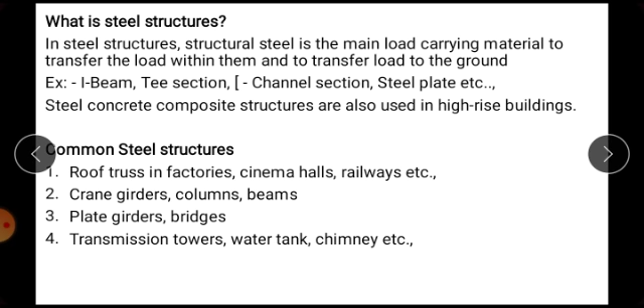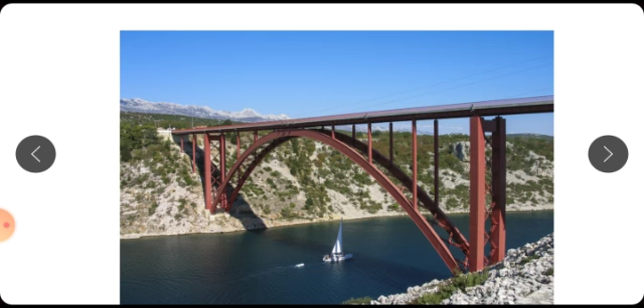Now this is the old arch bridge. This is the steel structure, you just see this. This is an I section, this is an L section. So this is an old arch bridge.

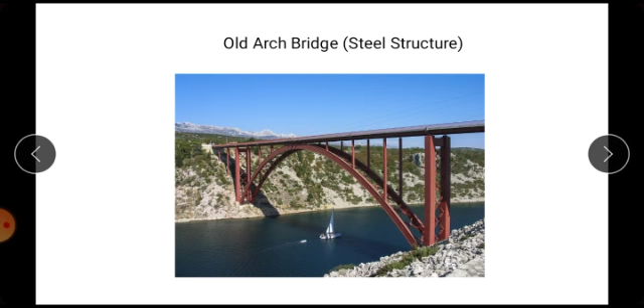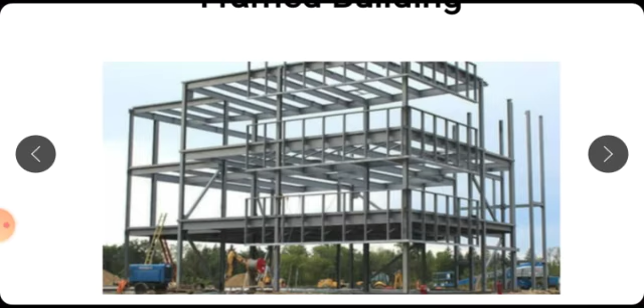Now this is a frame building, made of steel. You just see how in this building there is mostly use of steel.

Now, advantages and disadvantages of steel. High compressive strength and tensile strength per unit weight, hence low construction weight, and it saves spaces.

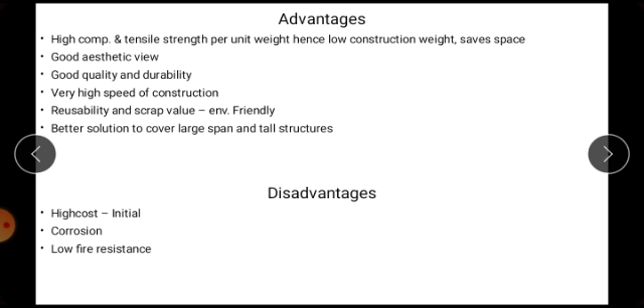Just see what is the steel structure. Now there is a definition of the steel structure. Structural steel is a category of steel construction material that is produced with a particular cross section or shape, and some specified value of strength and chemical composition.

You just understand: structural steel composition - strength, size, shape, strength, and storage are controlled in the most advanced countries.

The word structural steel includes a broad variety of low carbon, manganese steels that are used in a great number of civil and marine engineering applications.

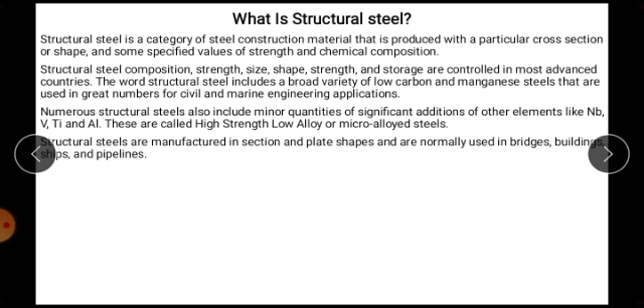And there is a chemical composition of some typical structural steel. There you see type of steels and designation, IS code - which IS codes are used, and...

Carbon, manganese, sulfur, phosphorus, silicon, carbon equivalent, which is the standard structural steel IS 2062.

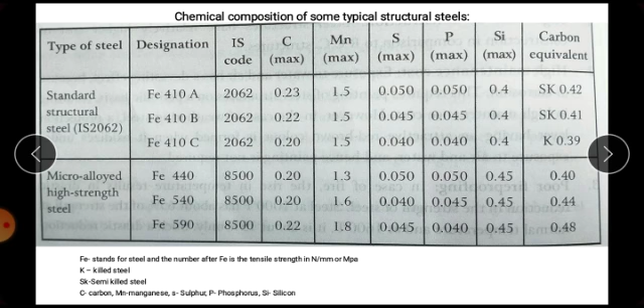K means killed steel, SK means semi-killed steel. C stands for carbon, Mn for manganese, S for sulfur, P for phosphorus, and Si for silicon. These are the signs used in this table.

Now the properties of structural steel: physical property and mechanical property, two types are there. For physical property, unit weight of steel is 7850 kg per meter cube. Modulus of elasticity E equals 2 into 10 to the power 5.

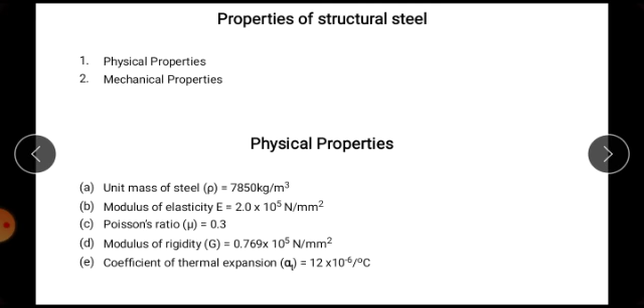Coefficient of thermal expansion, alpha T, equals 12 into 10 to the power minus 6 per degree centigrade.

For mechanical properties: yield stress is Fy, tensile stress is ultimate stress Fu, and the maximum percentage elongation on the standard gauge length.

Notch toughness is another property. These properties are seen in the IS code for steel, IS 800-2007. This table is in the IS code.

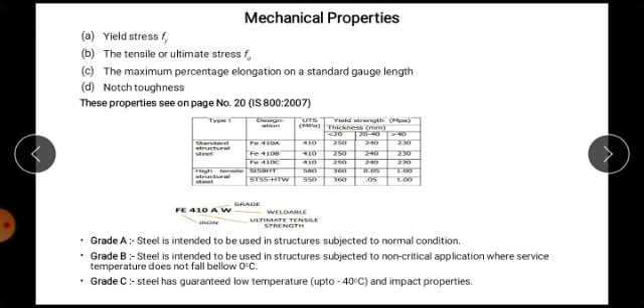Here we have grade A, grade B, grade C. Just see this table, it's not very important, just learn something from it.

Here you see Fe 410 WA. What is the significance of Fe? It means iron. 410 means ultimate tensile strength, grade A, and W stands for weldable.

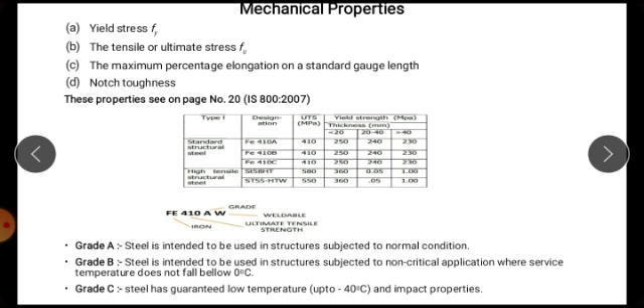Grade A steel is intended for use in structures subjected to normal conditions. Grade B steel is intended for structures in non-critical applications where service temperature does not fall below 0 degree centigrade. Grade C steel has guaranteed low temperature properties up to minus 40 degree centigrade and impact properties.

Now, rolled steel sections. There are various types of rolled steel sections manufactured, listed below: rolled steel I section, also called beam section, rolled steel channel section, rolled steel angle section, rolled steel T section, rolled steel bars, rolled steel tubes, rolled steel plates, rolled steel flats, and rolled steel sheets and strips.

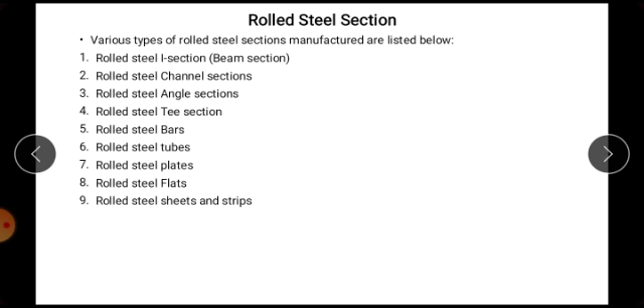Just read this and learn. Now rolled steel I sections, which are also called steel beams or rolled steel joists, are extensively used as beams, lintels, columns, etc. It consists of two flanges and one web.

These are available in various sizes, ranging from 75 mm into 50 mm at 61 Newton per meter length, to 600 mm into 210 mm at 995 Newton per meter length.

Following five series of rolled steel I sections are manufactured in India: ISJB stands for Indian Standard Junior Beams, ISLB for Indian Standard Light Beams, ISMB for Indian Standard Medium Beams, ISWB for Indian Standard Wide Flange Beams, and ISHB for Indian Standard Heavy Beams.

Now see the I section. What is an I section? Here, this is the I section. You see two flanges here, this is the web.

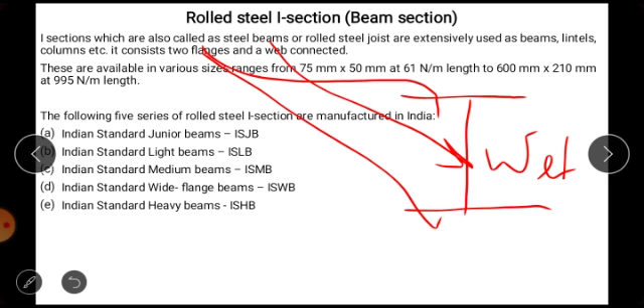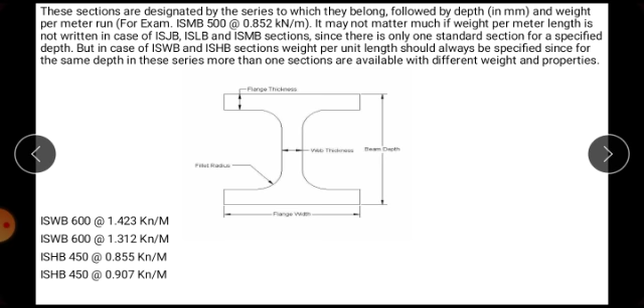Now we go to the next topic: rolled steel channel section. Channel section is a type of C section. This is not very important. The channel section or C section consists of two equal flanges connected to a web at both ends.

Channel sections are extensively used in steel framed structures. They are available in various sizes ranging from 100 mm into 45 mm to 400 mm into 100 mm, with corresponding unit weights of 58 Newton and 494 Newton per meter length respectively.

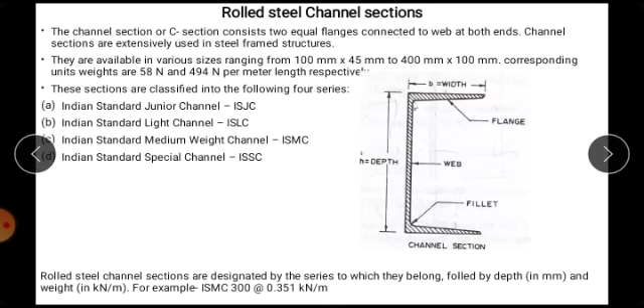Now we go to the next page. Here, rolled steel angle sections. This is L type of section, known as angle section. There are two angles: ISA Indian Standard Equal Angle, and ISA Indian Standard Unequal Angle. Thickness of legs of equal or unequal angles are the same.

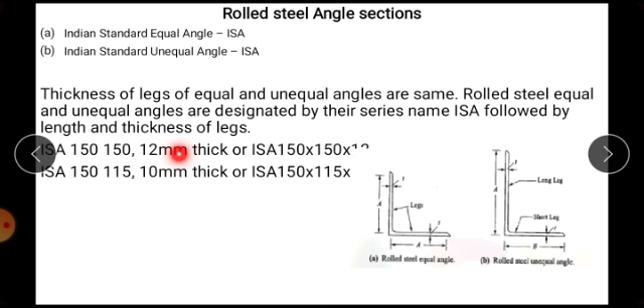Rolled steel equal and unequal angles are designated by their series name ISA followed by length and thickness of legs. Okay, this is for ISA, you just read it. This is for equal angle, and this is for unequal angle. Just see, and we are going to the next page.

Here, T section, rolled steel T section: ISNT Indian Standard Normal T bars, ISHT Indian Standard Heavy Flange T bars, ISSLT Indian Standard Special Leg T bars, ISLT Indian Standard Light T bars, and ISNT stands for Indian Standard Junior T bars. Okay, this is the T type of section.

You just see here. Now, as per IS 808/1984, the following T sections have also been adopted: ISDT, ISMT, ISHT.

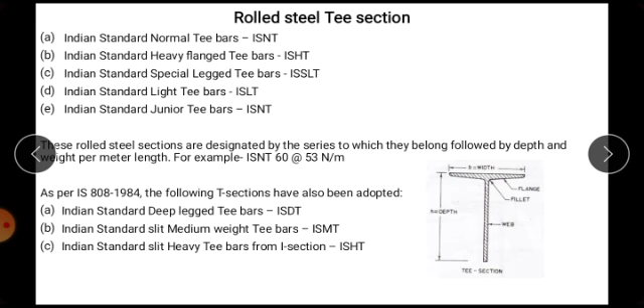Now, rolled steel bars, and there are two terms adopted here: ISRO and ISSQ. You just read it.

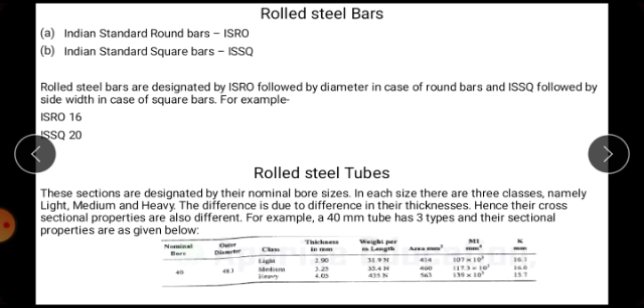And here, rolled steel tubes. This is not very important. And rolled steel plates.

And rolled steel flats. You just see here, rolled steel flats. Flats differ from strips in the sense that the thickness of flats is 5 mm onward, and their width is limited. Flats of the following width and thickness are listed in the IS code.

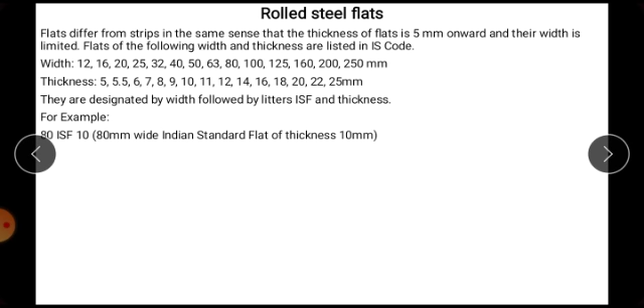Now just learn the width range and thickness here. They are designated by width followed by letters ISF, and thickness. You just learn the example: 80 ISF means 80 mm wide, Indian Standard Flat of thickness 10 mm.

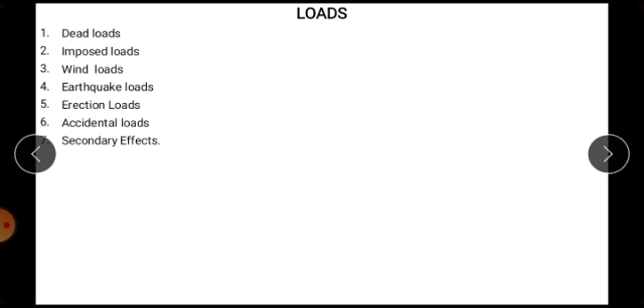Now this is loads and various types of load. Introducing the dead load, imposed load, wind load, earthquake load, erection load, accidental load, secondary effects. These are loads. And wind load, you know about the wind load.

This is caused by wind. Wind load is considered in design if the height of the building is more than 15 meters. The intensity of wind load depends upon the velocity of wind, size and height of the buildings. To calculate the design wind pressure or total wind load on buildings, the following expression is used.

This expression is important for GATE and IES, because questions arise from this formula. pz equals 0.6 vz square, where pz is in newton per meter square at height z, and vz is in meter per second, because this is the velocity. You know what the unit of velocity is.

You just see, up to the height of 30 meters the wind pressure is considered to act uniformly. Up to 30 meters you have to consider this uniform. Above 30 meters, the wind pressure is considerable.

It may increase. In order to calculate vz, the following expression is used: vz equals k1 k2 k3 vb, where k1 is risk coefficient, k2 is coefficient based on terrain, height and structural size, and k3 is a topography factor. This is wind load.